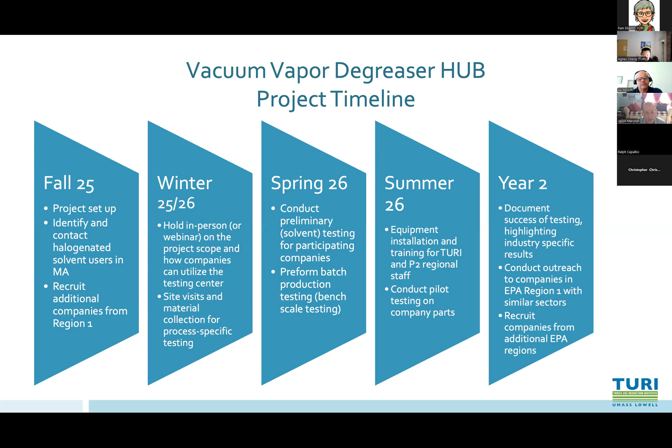We encountered along the way. So the main focus of the Hub grant is to review the chemistries, making sure that the solvents we're switching to are indeed safer than the current halogenated solvents, without sacrificing performance, and then keeping an eye on the financial impact of having to switch to a new process, a new machine.

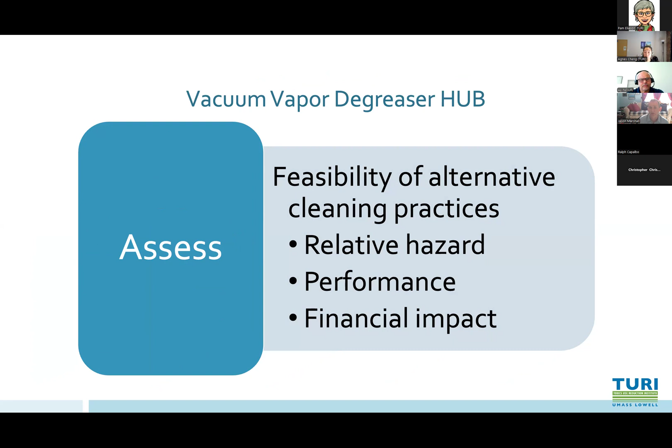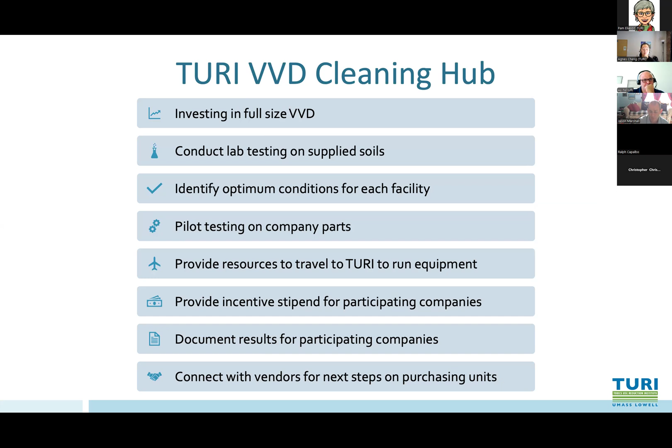What's new for us is that we'll actually have a full-size working vacuum vapor degreaser here at the TURI Labs to run testing for companies on their specific soils, finding the optimum conditions, so they don't have to worry about taking their process offline to evaluate alternatives. We hope to have money available to provide incentives to participate, either traveling to TURI or sending their parts to us, working together to do the documentation and reports at the end.

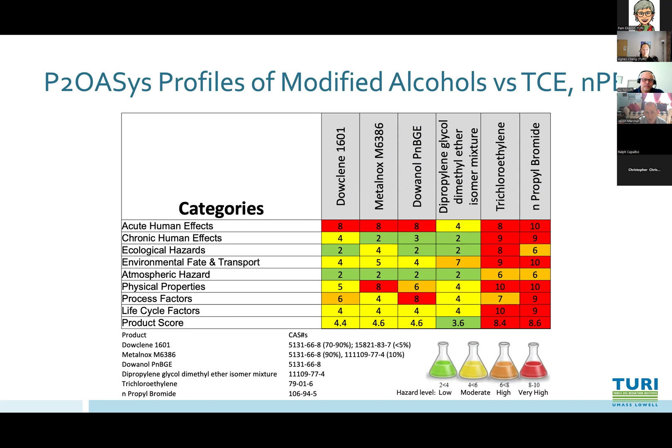So we talked about the overall safety performance. This is an example of the modified alcohols - there's a few out there from Dowclene and Metalnox. The middle two columns are the active ingredients in both those formulations, and you can see how they stack up against TCE and NPB. There's a lot of areas of concern for TCE and N-propyl bromide, same for methylene chloride and PERC. So we're showcasing that these are safer chemistries.

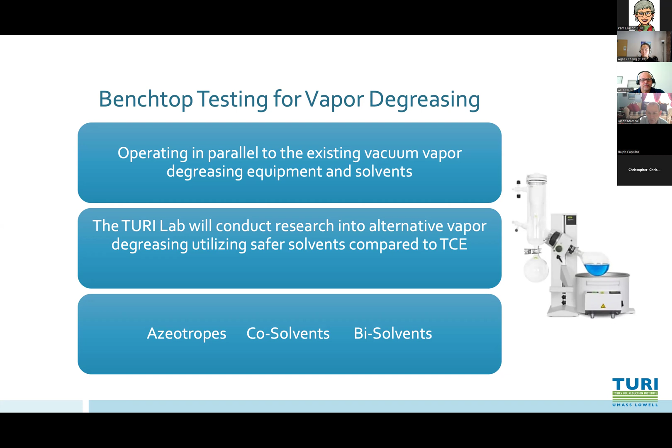As I mentioned, in some situations we may not be able to find the right chemistry that's off the shelf. So with our green chemistry staff and research people, we'll be looking into novel mixtures and new azeotropes, co-solvents, bisolvents. And this has all been nice and in theory until yesterday, when this stock picture could be replaced with our happy green chemist.

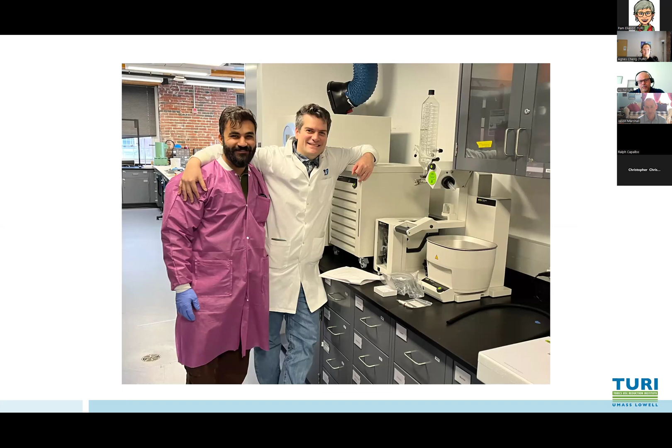There you see the rotovap machine that's going to simulate the vacuum vapor degreasing. It took him about 9 minutes to run down the hall, whip open the box, set things up, and say, I'm ready to go, let's get started. So he's ready to go.

We're looking to expand the success we've had in Massachusetts around the halogenated solvents replacement, strengthening our relationships with other P2 organizations in New England, and working with these companies to help them find safer alternatives.

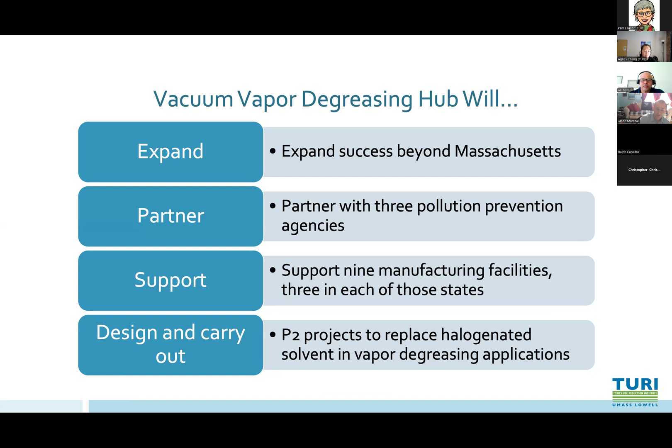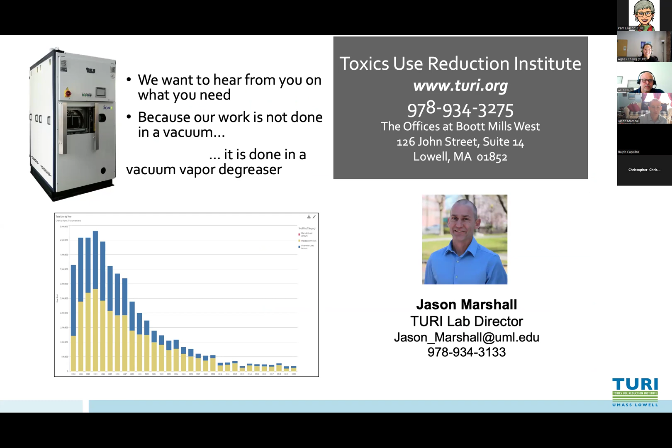We want to hear from you guys down the road about what your concerns are, what your needs are, because our work is not done in a vacuum, it's done in a vacuum vapor degreaser.

Thank you so much, Jason. Excellent dad joke at the end. I just want to open it up.

Does anyone have any questions about what Jason just presented and on the opportunities you have with TURI?

I actually do, and I'm not seeing where I can raise my hand. I'm sorry for being rude. That's okay, just stepping in.

So Jason, this is very interesting, and I just wanted to bring up Transene Company. I don't want to be a sales guy here, but we manufacture alternatives to the halogenated solvents that are currently being used in degreasing applications. I'd love to interact with you, probably offline, and provide some information. We'd be happy to participate, submit materials for testing, and it could be a Massachusetts-based manufacturing site for developing alternatives if we find that there's some additive or other modification that's needed. We'd be ready and eager to work with you.

Great, that sounds excellent. So I see your email, jason dot marshall at... Yep, so I'll get in touch with you after the webinar today. Sounds good. All right, thank you.

Excellent, does anyone else have any questions, comments, want to get involved? Hi, morning, I'm Jim Salenza from Rikers, Rhode Island. For a number of years we worked with environmental management here, solving the substitution issues. We're certainly very interested to see that the hub is now proposed to include out of Massachusetts opportunity.

Give me one second. Yeah, no worries. So you'll just want to start the slideshow so we can see the slides a little bit bigger. I know we were just saying, most of us are a Teams organization, and every time we have to get on Zoom, it's like relearning everything.

From the beginning, correct? Nick, I sometimes find it easier to use the little icon on the bottom right of your screen to click on the slideshow. Do you see the little screen icon next to the sound bar in the bottom right? There you go, that guy there. There she is, okay, hopefully. Oh, I gotta start from the beginning, so sorry. There we go, okay, perfect. Alright, about there, that we go, finally got there.

Okay, thank you very much for having me speak today. Again, my name is Nicholas Capalbo. I am co-president of New Method Plating in Worcester, Massachusetts. The folks at TURI basically asked me to speak about our process, and it's been an adventure, an educational process of upgrading from TCE, or trichloroethylene, to alcohol-based solvent.

It has been a timely process, but we do have some definite positive results, which I'm going to touch base on. That was really basically my presentation, the whole experience from making this decision to where we're at now.

So just a quick little blurb about us. We were established in 1931 by my grandfather. We are a third generation business, my brother Chris and I.

I threw this in as an important tidbit on trichloroethylene. We have been using trichloroethylene for well over 50 plus years. It's always kind of a situation with a lot of platers and chemical users - if it's not broke, don't fix it. It's a great product, it has always done the job, we've always had successful cleaning, but ultimately it's on the endangered list. We know there are some health hazards and some concerns. So it was always one of those things like, yes, we need to address this, but we knew it was not going to be a quick transition when we're having great results with something. To try and switch to a different chemistry, we were concerned with quality issues, production issues, et cetera. So it has been a lengthy process to really reconfirm that we're doing the right thing here.

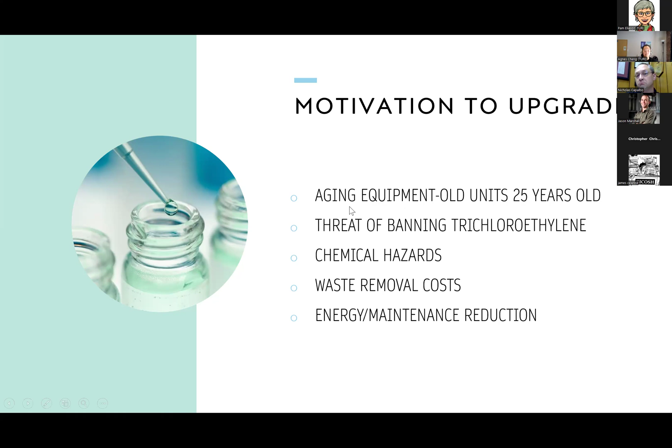Again, we do two different processes with our vapor degreasing. One is for surface preparation prior to plating, basically to clean off burrs or heavy contaminant oils that the caustic and various cleaners will not take off. The other part of our business is strictly vapor degreasing. We have customers that send in products to be vapor degreased and sent back out. Those are two different aspects of the machine.

One point I'd like to make is that for us specifically, we are a job shop. We don't know what's coming in. We have to be able to adapt to all different types of products that could come in at one time, or it could be years on end coming in. We don't know, so finding a machine and chemistries to adapt to that was a major concern for us.

Quick little rundown of what basic materials we do process: steel, some die cast, brass, stainless steel, and aluminum. That's kind of the basic materials that we handle here for either surface prep or final production for cleaning.

Either way, there is an importance for oil removal. It is very key, obviously, for plating. If you have terrible buildup, oil contamination, buildup on the parts, you're going to have production issues, flaking, etc.

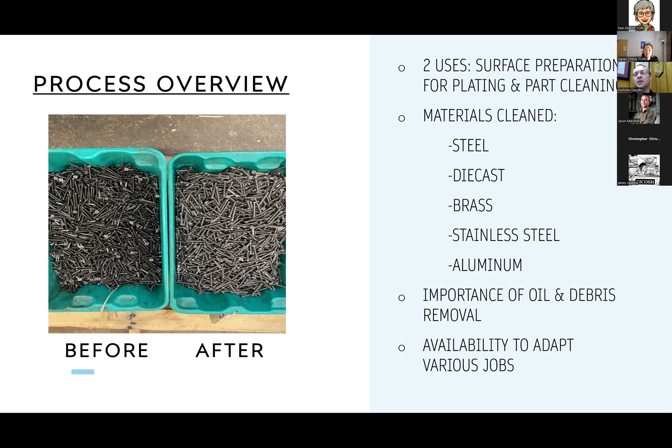The new machine is an ILSA manufacturing, an IK40E - it's a vacuum degreaser, metal cleaning machine. The chemistry that we ended up buying and purchasing after some research is the Dowclene 1601 modified fluid, a modified alcohol based solvent. The machine is manufactured in Italy, and the representative is through Alliance Manufacturing here in the United States. I can give you some more information on that as we go through the presentation.

One nice thing here is we're going from two pieces of machinery that need twice the amount to one piece of machinery that has everything encompassing. We were very happy to have one machine to handle all of our production. It was very well executed as far as going from two to one. We've been very happy with that - maintenance reduction.

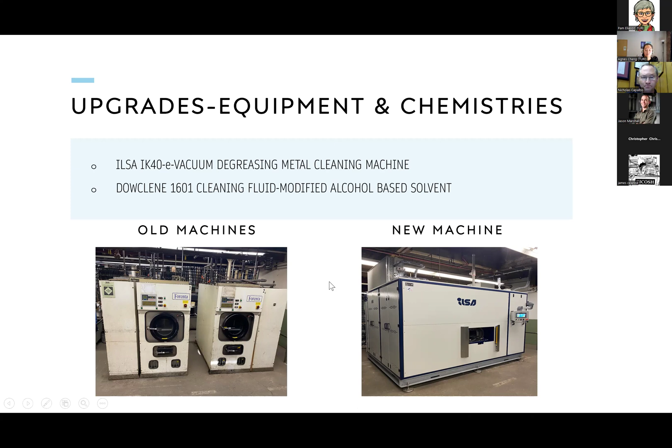So they asked me to talk a little bit about implementation experience. As far as the chemistries, there are a wide amount of chemistries, and chemistries with variations in them that we found. The biggest thing I can tell you is reaching out to your suppliers, talk to people, get some information as far as - hey, can we do this type of work, I'm looking for this type of results, we run this type of production. Chemical suppliers usually can point you in the right direction.

Picking out the right chemistries is very important. Trialing is something we did - we made use of TURI, they did some trial samples for us. A lot of the chemical suppliers are willing to send you samples. One supplier actually sent us a unit, a complete machine to test out. Trying to visit places, customers, and so forth - there are some resources out there to make use of to try it out.

It's important to get your SDS sheets on your chemistries, see what's in them, what's available, make sure there's no issues for what type of production you are running. Equipment selection is a big one - there are a lot of manufacturers out there.

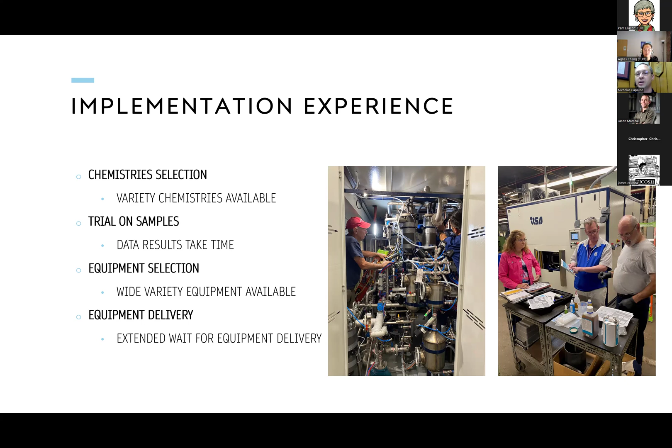So don't wait on this. This is something—if you are at a point where, for us, our machinery was at the point of failure, we had just crossed the line of ordering it just in time to take the next leap, remove the old machinery, and put the new machinery back in service. We were just there. So that's one thing I'd like to tell you as far as implementation: don't wait. If you're at a point on it, do your research now because there's a lot of information and a lot of considerations to purchasing a new machine.

Again, kind of touching base on considerations, that's kind of where I'm at. Reach out to TURI. They were very good, they did a lot of sampling for me. I started this project probably a solid 5 years ago, trying to put some materials aside, reach out to chemical suppliers. I think it has been a process.

I viewed different manufacturers for this particular machinery. The sales rep was nice enough to let me go to a customer and actually go see the equipment. I think that's very important, a great opportunity if you have it, to go physically look at the equipment. Obviously, the chemistries—luckily, the machinery that I saw happened to use the same chemistries we were interested in, which made life a lot simpler. But going to actually see the machinery, open the doors, and ask questions of the current person operating it is very important. It's a big decision.

The chemical suppliers, again, they will reach out. There was a fairly lengthy determination going back and forth about the types of oils we were using or receiving, chlorinated oils, et cetera. Repeating, as a job shop it was very tough to limit down to say, yes, we're going to receive a certain type of oil. Some of our products come from overseas. It is very difficult to narrow down exactly what type of oils.

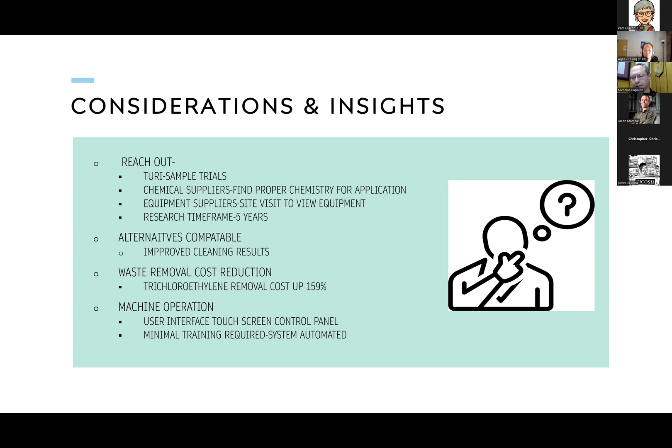Just some quick results. Again, July 23rd was our initial startup, so we're not exactly a year into this operation, but we're several months in. So far, so good. Again, I already touched on this, that there have been no chemical additions made to the machine.

Maintenance in the lab - again, the machine will remind you after so many cycles, per your setting, to drain the oil. It will tell you when the water separator has to be drained. It will tell you when it's time to do lab testing. I think there's something to be said about that, especially with degreasing, where it's an automated machine - you're putting the product in, you start it, and you kind of walk away. This gives a lot of checkpoints to remind you what has to be done. It'll tell you, hey, it's time to do something.

With the fully automated machine, we've definitely seen reduced cycle times compared to our old machine. One of the downfalls of the older technology is that it ran based on time - if it was programmed to wash for 2 minutes, evacuate for 30 seconds, dry for 6 minutes, then it was done. That never allowed for 100% clean parts. Whereas now, the machine is doing all the guesswork.

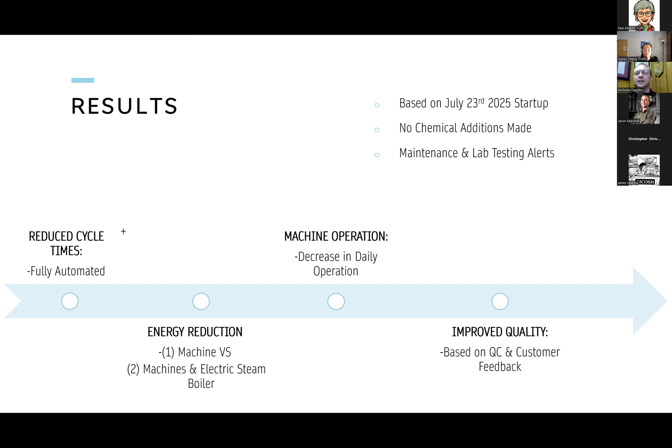The last tidbit I'd like to touch on is the customer feedback we received. We had told some of our customers we were implementing a new chemistry - not necessarily wanting to, but we wanted to get some blind feedback. So we said, yep, we're making a change to our cleaning system, and we got some drastic feedback. Customers told us there was much better cleanliness, less residue, and so forth. That has been great - a really great advantage to this whole process of getting this machine completed, installed, and physically in the building. So that's it.

That's kind of my rough outline. Has that been about 20 minutes? I didn't start my timer.

No, this is excellent - thank you so much for sharing all of that. Sure. We had a lot of eager questions in the chat. Pam, would you mind reading some of them out? Yeah, sure, no problem.

So Nick, to your last point about working with customers, Chris asks if you had to notify customers ahead of time, and whether there were any issues there. No, none of our customers had any issues.

We explained that we were eliminating a hazardous chemical - they all knew we used TCE - and said we are going to a greener product. We had no pushback from any of our customers. They were more than willing and very happy to hear that. They said, great, that sounds good, we'll keep an eye out for it. It was nothing but really positive feedback, and it matched our own QC feedback as far as examining parts - we could tell right away that stuff was coming out cleaner than before. So it was all great feedback from our customers.

Great. John was asking whether or not the ILSA unit is able to recover or recycle the modified alcohol - how does that work? Yes, okay, so as far as that goes, yes, it is recovered.

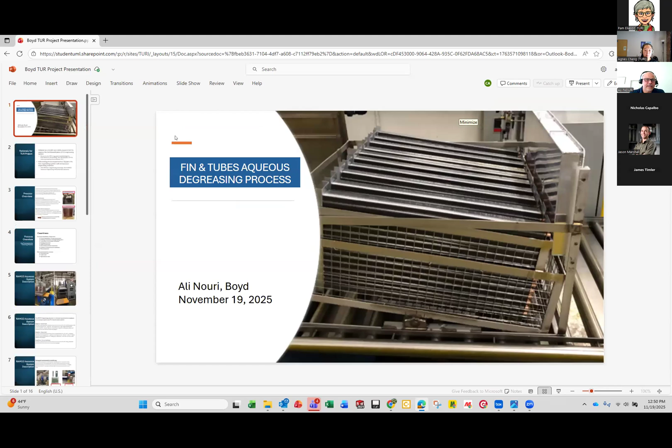Alright, so I need to share. What is that share thing? Share presentation, okay. You just need to start the slideshow. Give me one second. Okay, so right now we're seeing your desktop, just giving you a heads up. Is my screen shared or not yet? Yes, you're sharing your screen. So yes, there we go. Perfect, alright everyone.

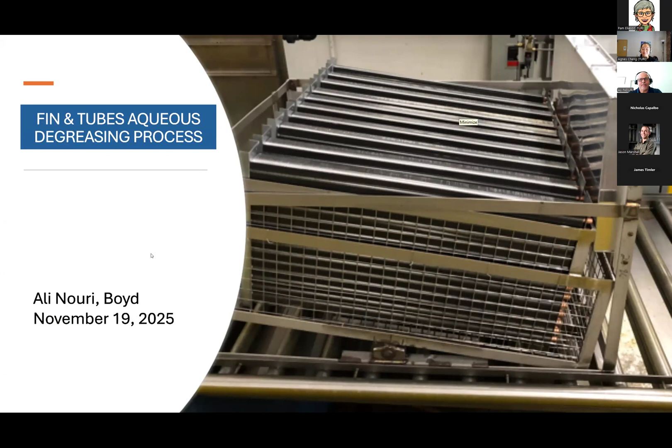Go ahead. Yes, so for our experience, we also were using TCE. We were using actually two units, two different departments. One department we went to a different vapor system, not TCE, and in the department where I work, which is tube and fin, we used an aqueous system.

The goal was not financial, it was mainly because TCE will not be allowed anymore in the United States to be used. So that was the main reason behind us switching to the aqueous system.

Again, as I say, it was a safety requirement to replace the trichloroethylene, TCE, degreasing system. We know the regulation will prohibit the manufacture, processing, and distribution of TCE and any material that contains TCE. So the decision was pretty much through also to replace the TCE degreasing system with an aqueous one.

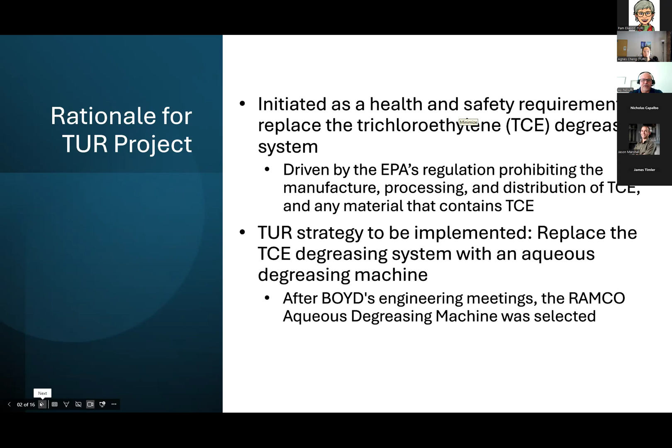So the aqueous process is very simple.

It's something that a lot of industrial places have been using it for a long time, and it's specific. So every business or every field that will need to adapt the system to their need, and not the opposite. It's easy adaptable compared to our system.

Our company makes a heat system, cooling system with heat exchanger as a main part of our production. We work with aerospace and defense in North America and Europe. Our core business is cooling system design and manufacturing primary heat exchangers.

Our first section of business deals with vacuum brazing. Vacuum brazing is highly demanding, the requirements are very, very tight as far as cleaning. Any part that you put in the oven has to be cleaned to a vacuum brazing system standard, which is very, very high. So for that, we picked a vapor system.

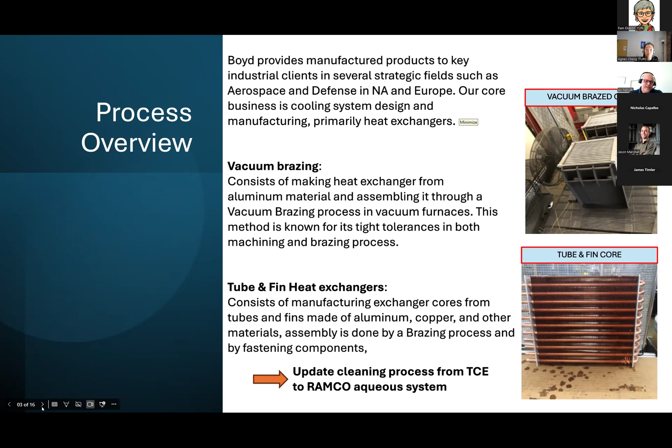So now for our standard, the Boyd standard as far as cleaning goes, we have some key parameters to the cleaning process.

Before cleaning, we do a visual inspection, and after cleaning as well. We don't do it for all parts, but we have a procedure that every new batch or every new type of part, you need to inspect before to see if there is any solid, because the aqueous system does not clean any solid stuff. It has to be liquid or grease or something removable by the aqueous system.

We also test if the part is clean or not. We do heating inspection, we bake the part, or we just use a torch, acetylene or propane, and see the smoke. If there is any smoke, even if it's low, then the system is not cleaning.

Of course, we use a microscope to check. We inspect using a low power microscope. We do a wiping inspection for tubing specifically. We go all the way, some tubing is 24 inches, so we have to go all the way inside to the elbow, because most of them are hairpin.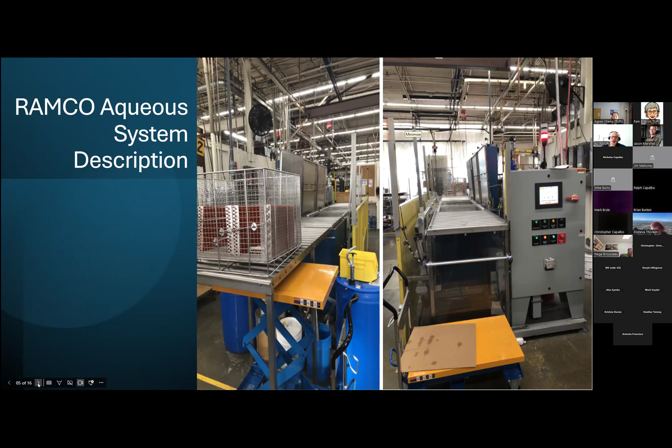So the wash tank is a double wall isolated stainless steel cover tank, 36 by 36 by 40. It's equipped with a reciprocating platform. The platforms actually move up and down for agitation. It's heated. You can heat it to 200 degrees.

It has two sonic transducers. We use sonic, we cannot clean without sonic, because we have fins and fins are very close, and you need to vibrate that somehow, or you need to get those little vacuum. The sonic creates those, pretty much like you're doing sandblasting, but with a vacuum, a little tiny particle. It's like a particle, but it's a vacuum. When it touches the surface, it almost explodes, and it actually mechanically removes the oil from the surface.

It's a great tool. And we have turbojet. We actually mechanically force the water to go through the part from the bottom and from the sides, lateral and bottom. And also we have a skimmer. The liquid is skimmed continuously to get the oil out from the surface.

And then the tank is filled. We have a fill pipe and a drain port. And we have a filtration system, very standard filtration system to filter the liquid, so our liquid is always clean. The soil is taken out. Any solid stuff that goes to the pump is filtered, and the water that is skimmed goes to a skimmer, and any oil that's in it will be taken out. We don't recover a lot of oil because our part doesn't have a lot of oil, so whatever we recover is taken care of within the company rules.

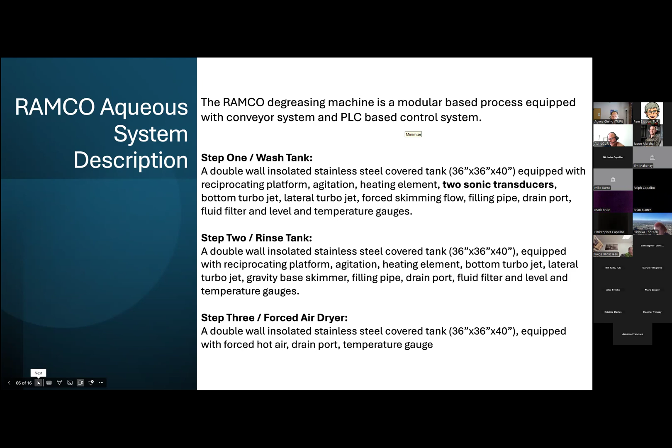So now the concentration. One of the main variables or parameters is the concentration of the chemical. So when we started, we were using one chemical that was causing a powder deposit on our copper and galvanized pieces. So we decided to change it, and we changed that.

Now we're using a different chemical. It's from Kyzen, made by Kyzen, and it doesn't cause any deposit, even though it's a solution that is made out of powder, but it does not cause the part to attract that powder and get the powder all over the place. So it's cleaner as far as powder, and we're working with it.

The concentration for the Kyzen, we check it by checking the conductivity, and then using the chart we can tell the concentration. So the concentration usually is between 3 and 6. That's normal. Above 6, it's too much chemical, too much soap. We stay between 4 and 5. That's what's cleaning pretty good. Between 4 or 5, it's pretty good.

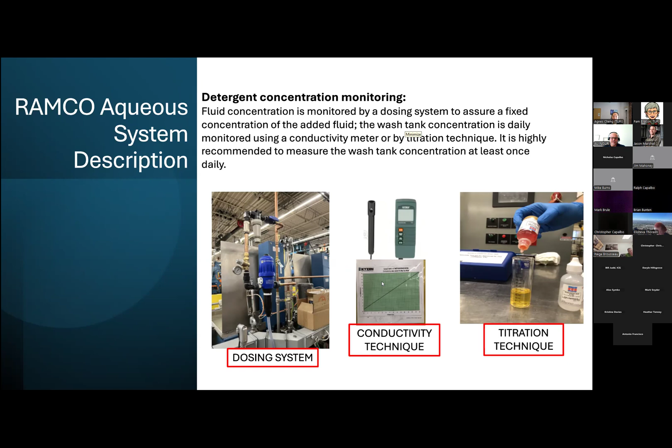When I started the system, it was very difficult for us to clean parts for a lot of reasons. The phase 1 testing machine, we verify the machine, we start verifying the machine. Everything works, and the manufacturer helped us a lot on that. They gave us pretty much 24 hours.

Anytime we call them, they are there trying to start the machine. We start it up, everything runs fine, and then the problem is the cleaning was failing. We were not cleaning. The machine, when we got it, had a basket that we designed, and the first design was done without knowledge of the problems we had after that. We just designed a basket thinking, okay, this is the way we're gonna use it. It's a basket with an incline, so we put our pieces inclined in one direction, hoping the liquid would go inside the tubing and clean. It didn't work. Nothing worked at that time.

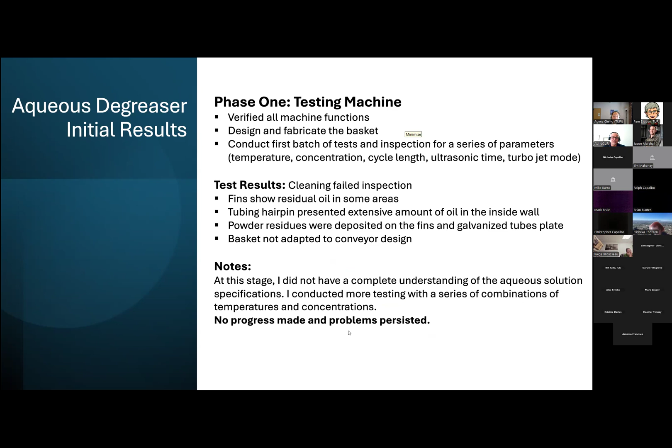At this stage, I didn't have a complete understanding of the aqueous solution specification. That was my main problem. I conducted more testing with a series of combinations of temperature and concentration. No progress. So what happened then?

I had to come up with something. So in phase 2, I modified the detergent. We changed the detergent and did tests at different temperatures and concentrations, using the same basket. I did not redesign the basket. At that point, I didn't know that the basket was also a problem. So we noticed some improvement. No powder. The second chemical was fine.

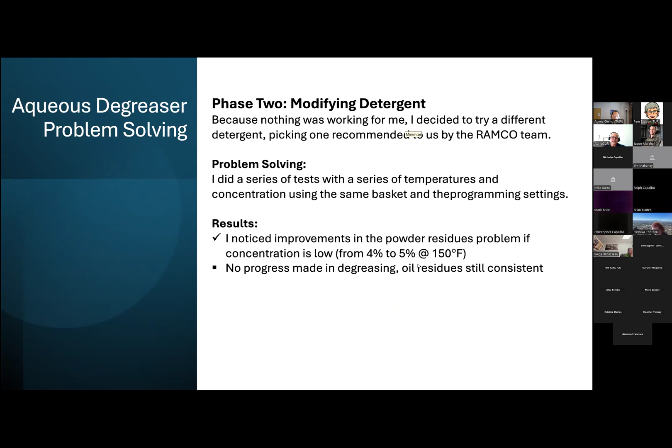And this is pretty much the value I was talking about. If we stay between 4 and 5% at 150 Fahrenheit or 140 Fahrenheit, no powder, no problem. So no progress was made on oil cleaning. We still have oil on our part.

So then phase 3, we were like, okay, let's talk about the oil now. We will start testing our oils. Is the emulsification happening? Is the density of the oil right for a water system? And then we found out that we had to get rid of 3 different oils because they were not compatible with the aqueous system.

Some of them were soluble. Soluble oil is not good for our application. Some of the oils are heavier than the mix, and they actually stay on the bottom. So we changed from 3 different oils to the one oil we are using now. We consulted a specialist in oil, a manufacturer we have been working with for a long time, and they sent us a different oil that we now use in all our fin press and punch press machines. And that new oil is not soluble. The emulsification is perfect. It separates fast from the mix.

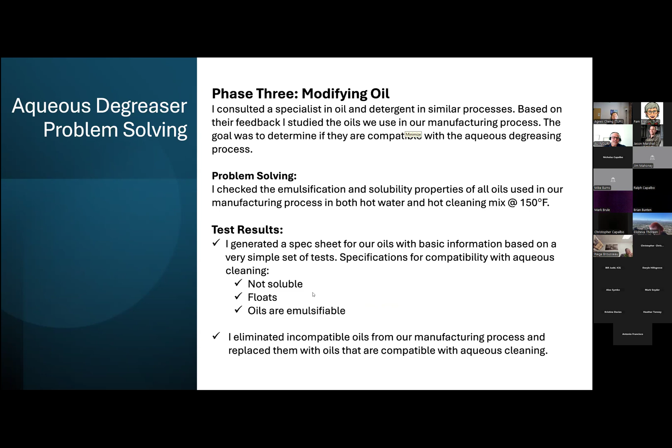It goes up, it floats, and then we can skim it, because any oil that does not float is not compatible. It has to float to be skimmed out from the tank. So when we changed the oil, that was the best result as far as emulsification goes. We were not contaminating our tank. The tank stays clean, and we can see and skim the oil, but we still were not able to clean the inside of the tubing.

Because remember, we make heat exchangers, and with heat exchangers we have tubing, and they are hairpin tubing, which means the tube has an elbow at the end. So if you incline it in one direction, it may fill and not drain. In the other direction, it will not fill. It may drain, but it will not fill completely. So you will have oil inside.

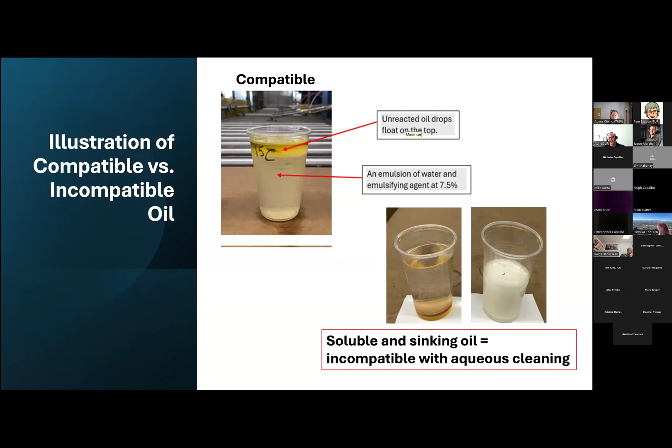Now the fourth phase, which is the basket - we went back to the basket. So after eliminating the oil problem and the chemical problem, the basket had to be redesigned. So I designed a tilting basket. The basket has to move to allow filling and draining of the tubes. It was necessary that we fill and drain, otherwise we would never clean the inside.

It's not like a vapor system where vapor goes inside. The water system, it's water. If there's equal pressure at the inlet, water will not go in. You will have an air pocket inside, a huge air pocket that will not allow the tube to clean from the inside.

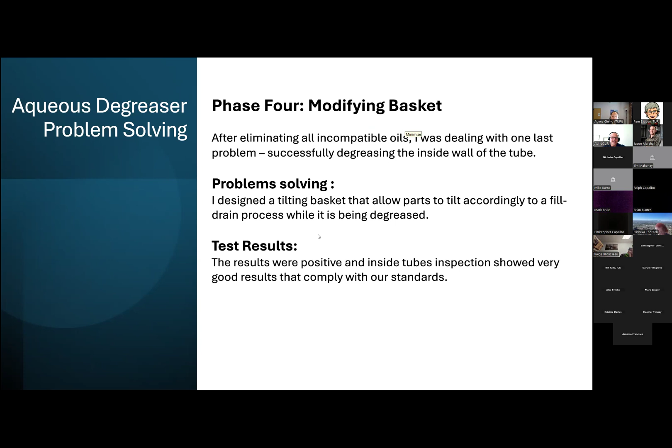So now we designed the tilting basket. This is the old style basket - it's inclined, like that. So we put our exchanger incline.

No matter what we do, we cannot get rid of the oil from the ID, the inside wall of the tubing. So we designed this.

It has a pivot, and it has a floater. We made a floater that when it's in water, it lifts it, and when you go outside the tank, the basket goes down and drains.

So it fills inside, it goes up, fills, and then it goes out, it drains, it tilts the other way and drains the tube. That movement is when we start getting a clean inside wall of the tubing.

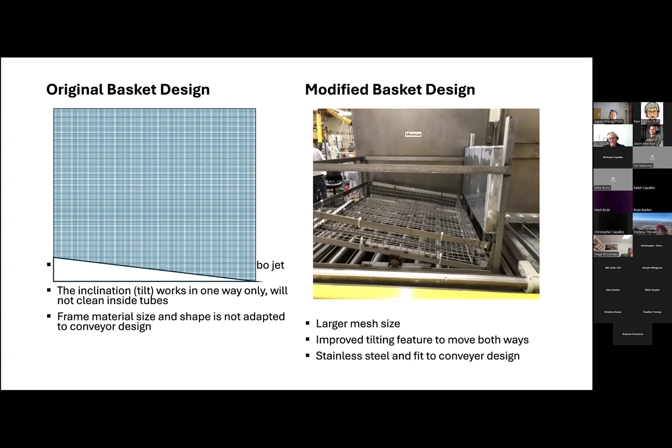And then the last phase, after we fixed all those mechanical problems, was the program. It had to change, because the new basket needed a program adapted to its functionality - when you go up, you have to wait until it drains, and when it goes down, you have to give it time to fill.

So we changed the program. The whole program had to be changed to adapt to the situation.

So all this could have been avoided if somebody else had the experience, like we have it now. Anybody who works on an aqueous system, if he sees this, he will right away go to avoid those problems and time wasting.

It took us almost 2 years to go through this, because when you change the oil, it's not easy. When you change the chemical, it's not easy. You have to do all the due diligence with customers involved, and it's a lot. So it takes time to do any change, and we had to do it.

There is no going back to the TCE. It has to be done.

So those are the two functionalities we focus on. The fin cleaning has its own time sheet - when it goes up and down, and it has sonic fill time.

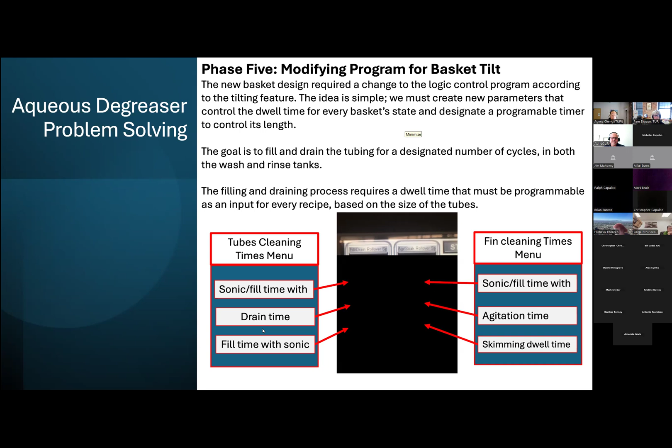All this has been done to start getting a clean part. So the last phase was the program. When we changed the program, we started getting good recipes and good cleaning.

So now we have some advice, and again this is just a tiny part of what we did. For anyone who's choosing an aqueous system, there are vital components, based on our experience.

Ultrasonics capability is a must. You can say, well, my part doesn't need it - it's not fins, it's not tubing, it's just a block or rods - but you cannot imagine how much time you save with the sonic.

Without sonic, you may leave it for 30 minutes or 20 minutes. With the sonic, 5 minutes will be good, and all the oil will be taken off any surface that the sonic gets to. Usually, if it's wet, the sonic will get to it.